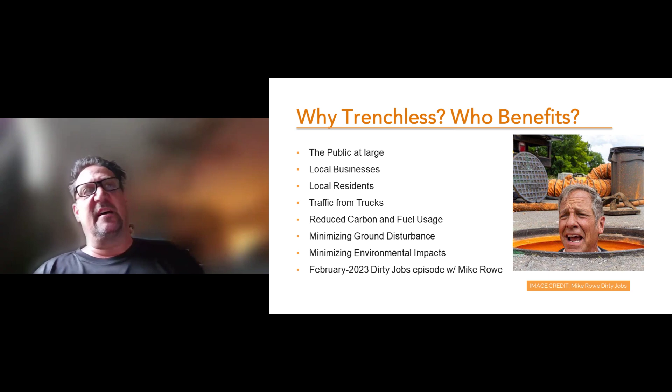Lastly, there is an opportunity to learn more about manhole rehabilitation. Back in February 2023, we did an episode on TV with Mike Rowe, Dirty Jobs, and we took him to a real dirty job. We took him to a McDonald's and we rehabilitated a manhole. That exists out there on the internet, and if you're interested, a Google search would probably allow you to track that video down.

Diagnose, advise, and treat. This is a methodology that we've come up with internally. We didn't invent this idea; I'm sure it came from the medical industry or something, but we've applied it to our lives and our daily work schedules, and it's definitely paid dividends over the years as it applies to trenchless activities.

Across the country, manholes and culverts are aging and deteriorating at a rapid rate. Left unrepaired at street level, these assets can cause concerns, vehicle damage, and potentially expensive and inconvenient replacement efforts. Below ground, damaged manholes can dilute sewage, increase sewage volumes, back up sewage alignments, and make wastewater treatment more inefficient. Bottom line, although an unseen asset from a public perspective, these assets below ground play a very important role in ensuring the system remains operational and efficient.

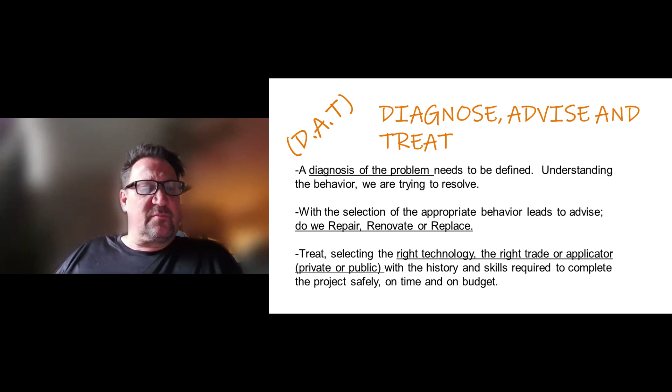So it's a Cinderella story. How big is the problem out there? There are a bunch of different studies. The one that I'll be referring to is one that I found from the University of Houston. The manhole is often overlooked and underappreciated, hence making it that Cinderella story.

To date, there's a number of research studies on pipeline rehab. These studies predominantly focus on materials and methodologies used for pipeline rehab, from structural, hydraulic, and economic perspectives. Ergo, there's a wealth of experience and tools out there for engineers to evaluate their options while selecting the material and technology to rehabilitate sanitary sewer pipes and underground manholes, i.e. underground assets.

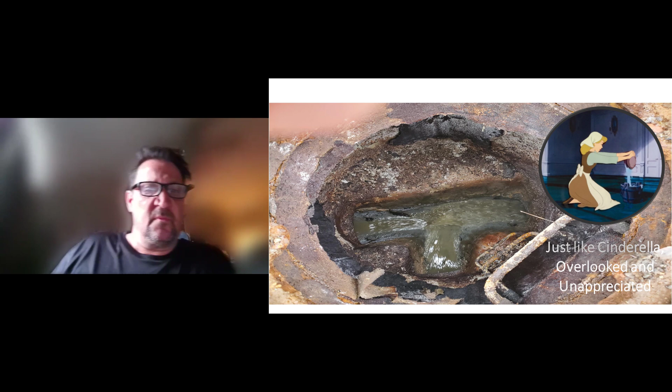On the other hand, manholes are a vital part of every sanitary sewer system, often overlooked, as they can be the main source of I&I. That's inflow and infiltration. I&I really is made up of rainwater and groundwater infiltrating and making its way into the asset. Just like Cinderella, again, the manhole is overlooked and underappreciated.

But again, manholes are considered windows into the sanitary system, as they're the most visible points for identifying the condition of our underground infrastructure. They also play other vital parts of our sanitary sewer systems. However, for this presentation, I'll be referring to them as our Cinderella.

Everything is okay, right, Rob? Sometimes, unfortunately, what can be out of sight can also be out of mind, and it's easy for us to stick our head in the sand or ignore and live a fairy tale, telling ourselves that we don't have problems, when in fact we do.

I'm going to use these ratios from the University of Houston, and I'm coming out to you today from Vancouver, British Columbia. The city of Vancouver, by these numbers, has 40,000 manholes. Approximately half of them are very likely to have challenges. 8,000 of them are older than 50 years old, and 12,000 of them are between 30 and 50 years old. Ergo, they're just starting to show some fatigue, much like myself entering my 50s here.

The city of Surrey has 31,000 manholes, applying the same ratios. 6,200 of them would be older than 50 years old. 9,300 of them would be greater than 30 and less than 50. And so with that said, 15,000 manholes in the city of Surrey are probably showing some challenges.

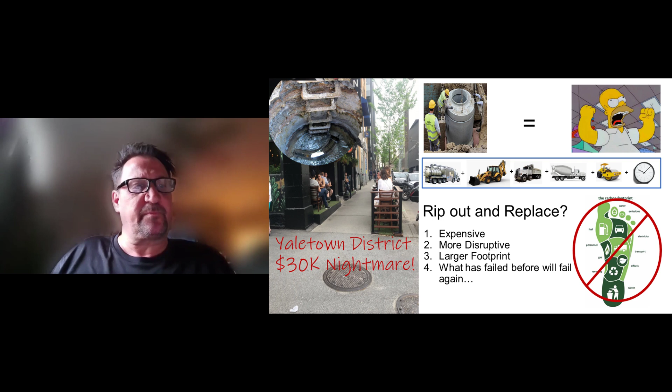So here's an example of a restaurant district here in Vancouver. There's a sanitary manhole right in the middle of the sidewalk, right next to the patio on a bright bluebird sunny day. And we can all sort of assume that conventional removal and replacement activities, civil, utility installation activities are going to be extremely disruptive. And this goes back to what I said earlier about equipment and tooling and personnel and noise and vibration and everything else. You can see quite clearly here that Homer's mad.

Yeah. This slide also highlights, we're going to have a hydro excavator, we're going to have a backhoe or an excavator, we're going to have a dump truck or multiple dump trucks for removing spoil, for importing granular. We're going to have compaction equipment. We might have cement mixers coming in to pour bases, and all of these things equate to a longer construction timeline. That said, they provide quite a bit more disruption to the community. They take up a larger footprint, and what's failed before

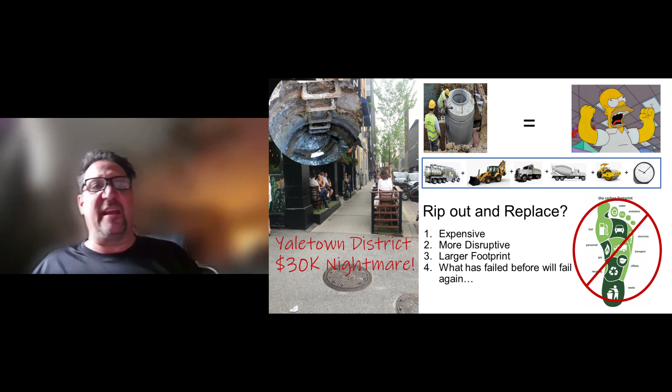will fail again. So we've seen that we installed a beautiful manhole in this location X amount of years ago, and it turns out, for whatever reason, there's high H2S and acid in this location that's eaten away the concrete of this underground manhole. And that said, great, we've returned it to its OEM condition here today, but we know that 30 or 40 or 50 years down the road, it will deteriorate once again. With that said, there are other opportunities.

So the first one is save money. This went from a $30,000 problem to a $10,000 annoyance. So just focusing very quickly and subtly on the finance piece, this allows end users to literally rehabilitate 3 manholes instead of removing and replacing one, again, where we're the right fit. So we've saved them money.

We're less disruptive because we've got a truck for the workers, and we've got a big trailer, and we're still going to have to use the hydro excavator, but we don't have the dump trucks. We don't have the compaction equipment, et cetera. And once we've applied an industrial coating that we're going to go into in more detail as this progresses, we have become better than OEM.

So yes, we've gone in and we've restored the OEM characteristics of this manhole, but now we've applied an industrial coating, in this case polyurea, that protects it completely from H2S and acid, preventing the new manhole wall thickness from corroding as it did in the past.

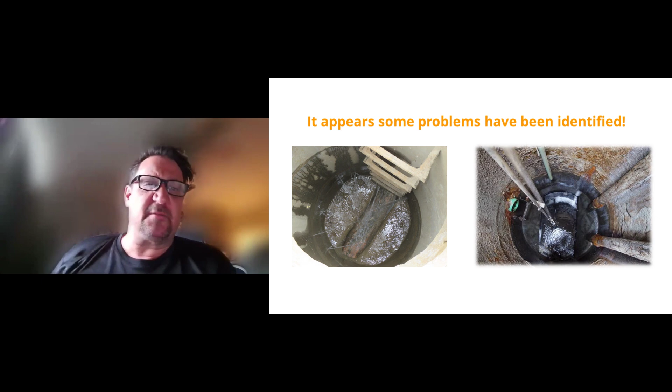So, Rob, are we going to reline all the manholes in the world? Is that sort of the answer that I'm suggesting here today? And it's not. We believe there's a much better way, but let's discuss that now. So again, a couple different examples of relined manholes. So here's the meat and potatoes here.

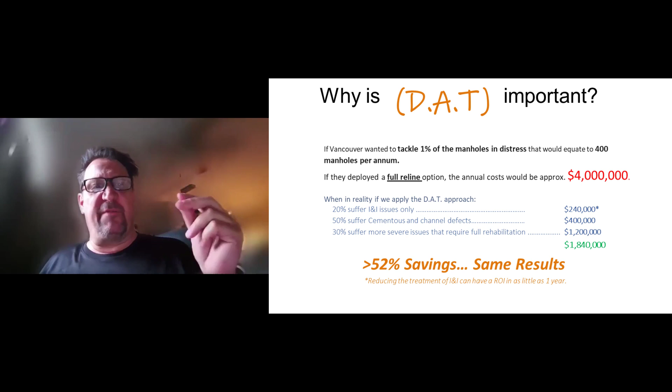Why is Diagnose-Advise-Treat important? If Vancouver wanted to tackle 1% of their manholes in distress, that would equate to 400 manholes per year. If they then deployed a full reline option just to make Rob happy, at a $10,000 average for 400 manholes, that's a $4 million expenditure. However, what we recognize from our experience in industry is that if we apply the D.A.T approach and we recognize that only 20% of the assessed manholes suffer from inflow and infiltration, it's only going to cost $240,000 to bring those manholes back to OEM.

If we recognize that 50% of them might suffer from cementitious and channel defects and require optimization with cementitious and other products, again, we can bring those assets back to OEM for about $400,000. Having said that, 30% of them, my goodness, are about to fail. They will require full rehabilitation, and for the sake of round numbers, that's $1.2 million. So what this says to us is that we can create a 52% savings and achieve the same result.

And that $2 million means a lot to municipalities and end users. That means they can do 800 manholes. That means they can fund a park project. That means they can rehabilitate a water main, or they can remove and replace a bunch of catch basins down the road. What they do with their money is their business. However, what we've been able to provide is a little bit of extra funding. And most municipalities, especially the smaller ones, really have to sometimes wait years and years to prioritize their different repairs. So this little bit of savings, I believe, can go a long way. And we got really good feedback from municipalities saying, you know what, Rob, this approach to problem solving really has paid some dividends for us.

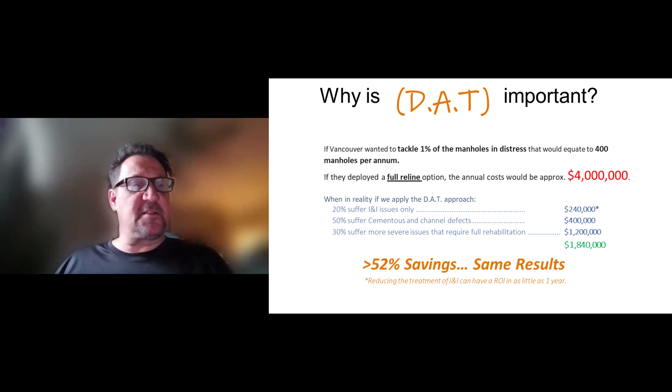Focusing in on that, I&I often represents about 20% of the defects within a manhole. The injection of polyurethane resins, which we're going to cover in a second with a little video, is the most cost effective, is considered a permanent fix, and does a great job. So you can see a worker here mobilized into what appears to be some kind of flooded chamber. You can see there's a 6 or 8 inch PVC pipe penetration, and if there was a gasket at that penetration, it's now failing, or if it was just grouted at the time of installation, bottom line, it's failing, water is trickling, or in this case, kind of shooting in. And this is very common.

So, sort of the causation of what you're seeing here is there's hydrostatic pressure out in the soil matrix that is applying force to the outside of this concrete asset, and where there's give, there's go, and water is leaking in or trickling in. What the worker's doing here is he's drilling a hole, and we're going to inject polyurethane foam into the soil matrix at the leak location, and we're going to use that very same hydrostatic pressure that's causing our leak to hold our patch in place.

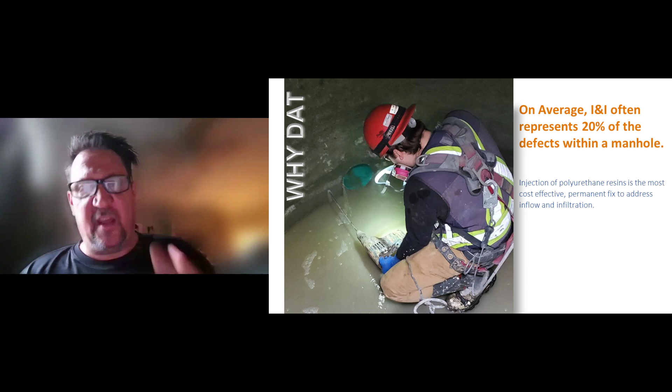Because our product, and I'm going to say our, I mean all polyurethane resins on the market, there's two kinds, hydrophilic and hydrophobic. Focusing on the phobics, they displace any water, they homogenize and mix with the silts and the fines, and they literally create a foam patch on the outside of the concrete asset, installed properly. And again, that same hydrostatic force causing the leak is now used to repair that leak and stop it from leaking. And the biggest thing out there that destroys polyurethane foam is UV. Underground, this product can last 100 years.

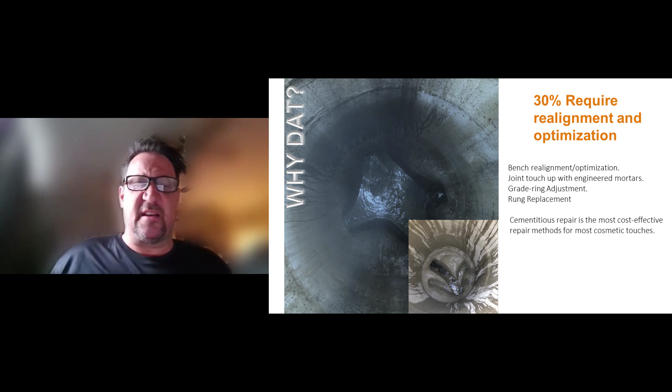Talking again more about the realignment and optimization. Sometimes manholes, you know, this one looks like it was leaking, but that was actually just from washing it free of biologicals to make it safer for the worker to enter. And it's just that the concrete had broken down in the benching. It was probably poured in place years ago, not precast. And a little bit of cementitious work goes a long way to making sure that the manholes that are often used in design for horizontal deflections are doing just that. And we're encompassing additional alignments, rather, laterals coming into those locations.

Then there's the other ones, and sometimes this is that X percentage where, unfortunately, the Cinderella story comes back, and we have ignored, or we've either failed to audit, or somehow missed. And so you can see that hydrogen sulfide and acid have just completely attacked this asset. We've lost half of the concrete wall thickness. We know this because we're down to the exposed reinforcing steel here. So where this would have started out as a 5-inch thick concrete barrel, it is now 2.5 inches thick. That's putting it at risk of failure, or it is failing, and groundwater or soil is coming into the asset.

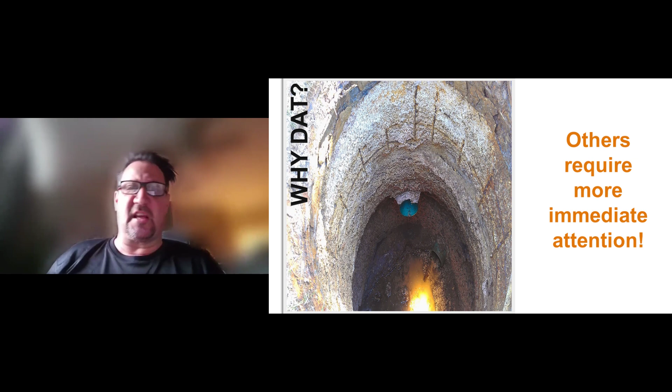You can see that all of this material that scaled off and fell off ended up in the bottom of the asset, clogging the channeling, preventing water and solids from flowing downstream to their final destination, if you will. You know, this one is at the absolute top of our priority list. This asset is nearing failure, and normally failure means it implodes, it falls in on itself, and sewage backups happen. And if they happen in the middle of the night, sometimes they're not detected till the next morning, and sometimes people wake up with some pretty nasty things in their basement due to issues like this. And my heavens, it is avoidable.

So one of the best ways to go out and sort of understand how big the problem is, is condition assessment. And this is a service that we and others offer, consultants, other contractors out there. Condition assessment, really getting an understanding of the condition of our assets. These can be completed in the field, so no confined space entry is required at this time. It's done at the per asset level, and the asset inventory is confirmed, and we can understand some of the characteristics of each asset. We can confirm the depth of the manhole, the diameter of the manhole, the materials of the manhole, most commonly concrete, but what are the connecting pipes made of? Asbestos cement, PVC, they could be metallic. What size are those connections?

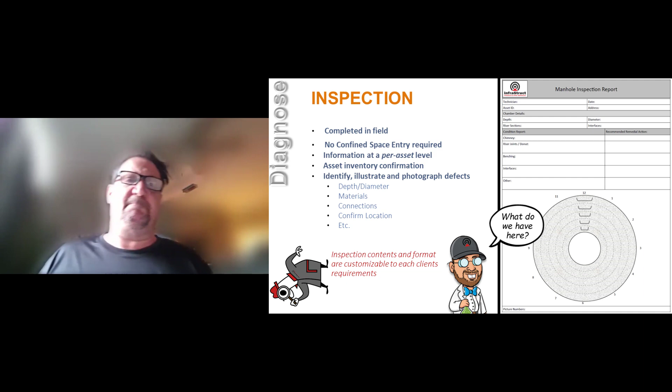So with that information, then we can go back to the office, and in the office, we can review the inspection data and recommend an action plan. That's really important because what we want to communicate to the client is a prioritized list and timeline. My heavens, we found 3 manholes that are at risk of failure today. You guys really need to focus on these 3 first.

And you know what, Rob, we don't have a budget for manhole rehab. Well, you know what? You probably want to deal with these 3 in whatever way is possible with the resources you have, and plan to deal with these other ones in the future as your budget or as your funding is provided.

The other opportunity it provides us is it helps us recognize systemic issues across multiple assets. It's very common when you come to a neighborhood and you find H2S damage in a manhole, the next manhole you're going to open in line is probably going to have that kind of corrosion as well. As well, you might recognize surcharging. The opposite of a surcharging manhole is a vacuum, and both of them can provide certain dangers.

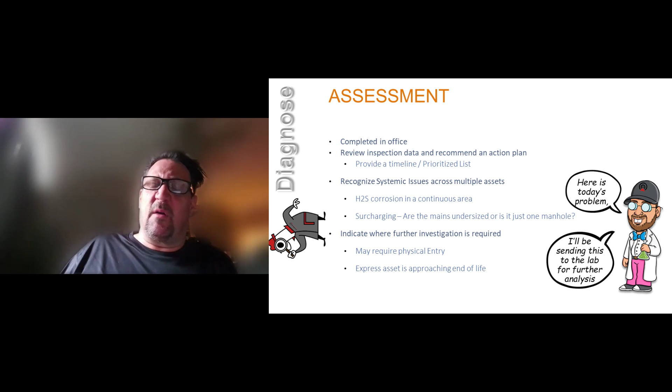So at this point as well, we may have identified that further investigation is required on these 5 or 6 manholes. We need to get in and physically take a look up close and personal at this, that, or the other thing. Maybe take a picture so we can share it with others, and really evaluate if at the end of the day the asset is just approaching the end of its life. Sometimes they are. And sometimes, rehabilitation isn't the answer. Again, under treatment, it's remove and replace, conventional activities.

With that said, the 3 typical behaviors that we experience and witness out in the field, and this covers under diagnose, where we are out there and we're visualizing. We have hydraulic inflow and infiltration, that is groundwater leaking in. We might have environmental exfiltration.

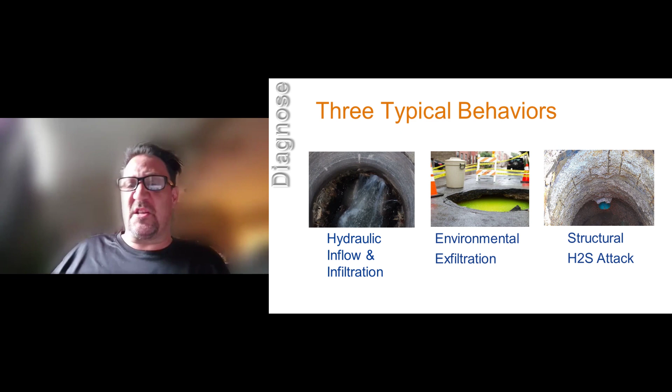I went to a landfill in the past where they had a leachate system and the manholes were leaking into the soil matrix. Previously, they did not understand that. They were happy to make that realization, as they wanted to obviously deal with it right away, and they did. And then there's the structural H2S and acid attack that I showed you in the previous slide.

So what are my options? The most common option here is point repair, and I call this see a leak, fix a leak. So there's a few different ways that we can fix a leak after we've witnessed it. Portland cements, shotcrete type mixes. There's hydraulic patches, and there's roll-on membranes, and there's the injection of polyurethanes or polyurethane foams, like I mentioned earlier. So we see a leak, we have a leak, and we have some options.

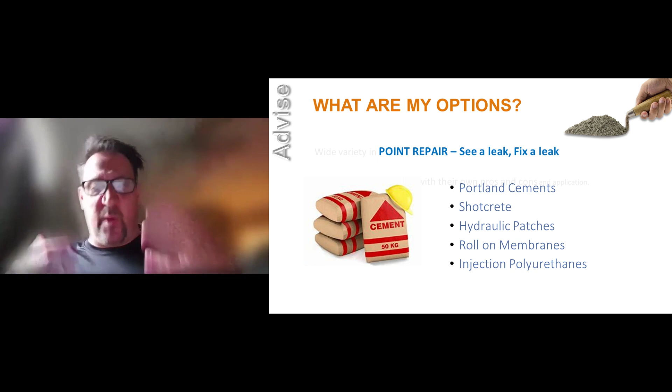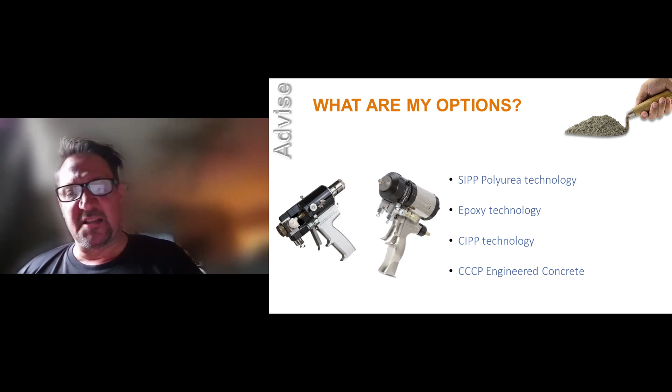What are my other options? Some of our assets might be deteriorated to the point that we need a different option. So that is SIPP, polyurea technology, SIPP being sprayed in place pipe or a pipe within a pipe. There's wonderful epoxy technologies out there in industry. There's CIPP technologies that are out there. And there's CCCP, that's a lot of C's, engineered concrete solution, that is centrifugally cast cementitious products. And we'll talk about that shortly as well for a better understanding.

So another option that's out there is mechanical seals for manholes and culverts. Manholes and culverts really share a lot of the same characteristics. One's vertical, one's horizontal. One of the biggest pluses about seals is they're economical. They really are. So you can fix a chimney leak with an internal seal without even going in the manhole. The reason that's relevant is because confined space entry takes time, and time costs money.

So the second benefit of mechanical seals is it doesn't take a lot of training to be able to install these seals. So this is quite often something end users and municipalities almost 100% of the time can install themselves, and they can carry some small, inexpensive inventories to have on the shelf. So when they experience it, they have a solution. They don't have to reach out to me or someone else to make a repair. They have the tools at their fingertips.

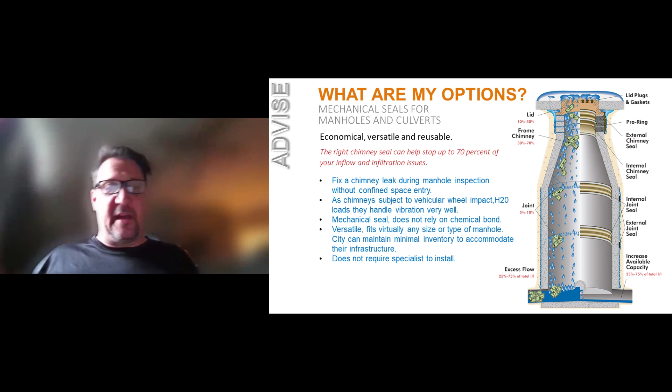So, external seals can also be used in areas where, when we're installing a new manhole, we can recognize there's groundwater. To install this manhole, we had to run a pump for 4 days. So we know that as we install it and we backfill it, the groundwater is going to come back up. This would be a great time to prevent I&I down the road by applying an external seal in the pre-construction phase. There's also butyl products that can be spray applied, roll applied, or brush applied externally that would accomplish the same task.

Advise full structural repairs. So full structural repairs, again, common reasons for failure ultimately is corrosion. The corrosion happens from sulfuric acids, our old friend H2S, road salts, and other acids from external sources, and of course I&I. So again, just to review what's going on with inflow and infiltration is as that water's leaking in, it's bringing soil in, and fines, that's creating voids in the soil matrix.

And those voids are now filling with water, that same hydrostatic pressure that's causing the leak. And as we apply H20 loads up top at street level, it's causing compaction and it's causing failure and alligatoring to the asphalt and void failures in the soil matrix. Of course, as previously mentioned, the spalling of the concrete substrate is also something.

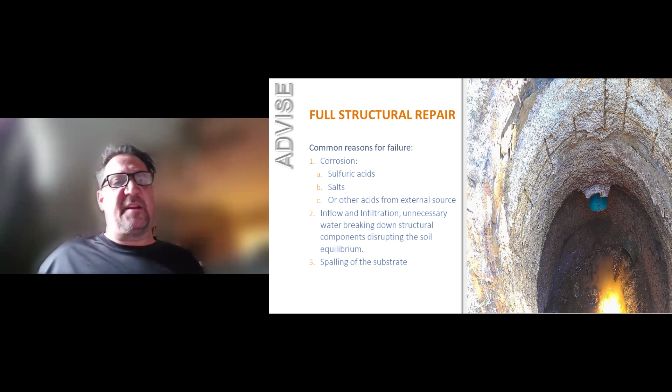We know that all of this material has made its way into the benching. It's clogged the benching. It's gone through a pump. It's been washed down to the next manhole, the next manhole, the next manhole, maybe down to the wastewater treatment plant, depending on proximity. Wherever these fines end up, they're going to have to be dealt with either with hydro excavation or evacuation in some capacity.

Other I&I challenges we have is through the frame and lid. So again, this is where rainwater is most prevalent at street level, and I&I through the manhole frame and lid can overwhelm sanitary systems downstream. First of all, we have solutions for that, but the reason for that is that we have 2 3/4-inch pick holes in every lid. That allows us to put a bar in there to remove the lid for entry or inspection. That also is the same as the drain in the bottom of your bathtub.

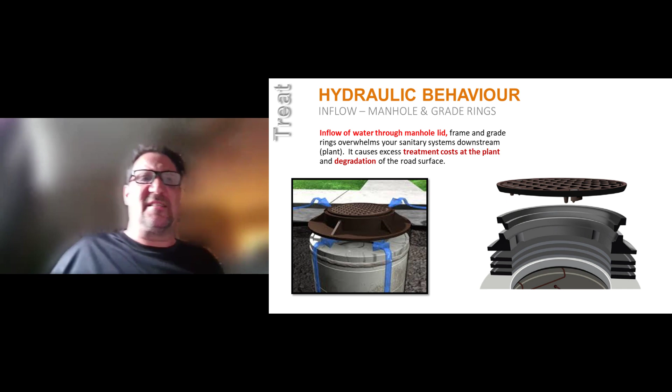So as water cascades down the road, and if it finds its way to these pick holes, rainwater is now going into your underground asset and watering down at minimum the effluent. And municipalities are spending money to mitigate rainwater. That's just crazy talk. So how big is the problem? There's, again, a few different studies. I was really just trying to demonstrate a point here.

These numbers might vary a little bit, but in this case, it's saying that 0.4 of a liter per second inflows through the 2 pick holes with 1 inch or 25 millimeters of submergence. So where there's 1 inch of water running over a surface or into a puddle, there's 0.4 of a liter going in. That said, a 6-inch puddle is letting in 1 liter of water per second. That's 60 liters of water per minute and 3,600 liters of water per hour, 24 hours a day, 48 hours, 72 hours till we get to it after the 250-year storm and deal with it.

So in British Columbia, some of our smaller municipalities unfortunately experienced this a few years back when we had a 250-year storm event, flood event, and their wastewater treatment plants were overwhelmed to the point where they had to physically be abandoned. The workers had to get in their trucks and drive away because the water just kept coming up and there was nothing they could do about it, and ultimately it turned into a swimming pool. All the water they were trying to treat mixed with rainwater spread out over the landscape. It was a disaster.

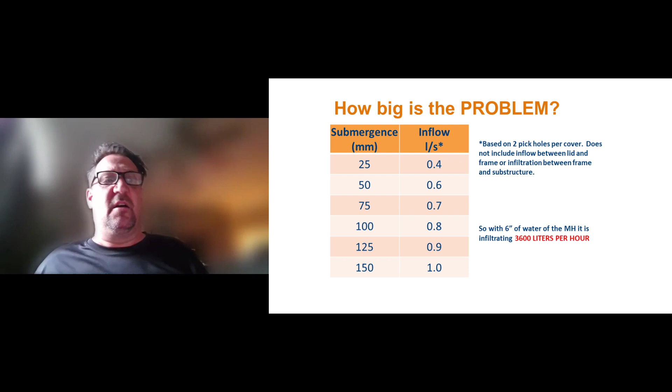So where they're in floodplains or where floods are known to happen, there is something that we can actually do about that instead of just letting it go into the system. There's other options as well.

So talking about the throat of the manhole anatomically, that is one of the more common or most common places where I&I happens. There are solutions. There are EPP grade rings instead of concrete that are tongue and groove, are put together with sealant, and they are bolted to the top of the manhole donut versus a concrete cap to hold them in place. With that said, the frame and lid is also bolted, and it becomes an assembly or a sandwich.

And this, without applying any grout, recognizing that this is an area where I&I is common in the top part of the matrix, this is a fantastic solution to mitigate I&I versus conventional concrete riser rings. The challenge with concrete riser rings is compound angles. Roads are often 1% uphill or downhill and 1 or 2% crossfall.

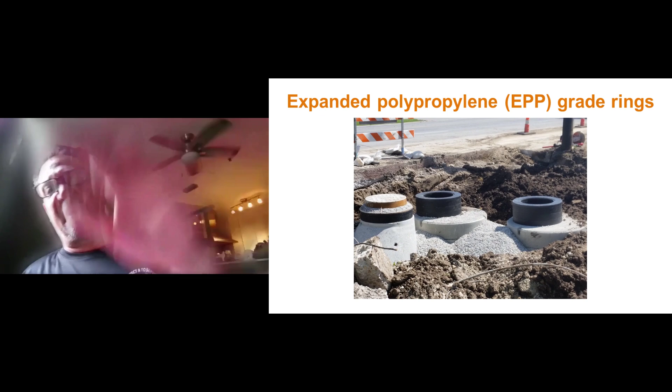What's different about these is they have tapers. They're not shown in this picture, but we have these plastic riser rings that are 1/2 inch at one end and 2 inch at the other. And so we can turn them like on the clock radius to accommodate that 1% uphill. We can put another one on top and accommodate that 1 or 2% crossfall. So simply by rotating our tapers, we can match the grades in the field.

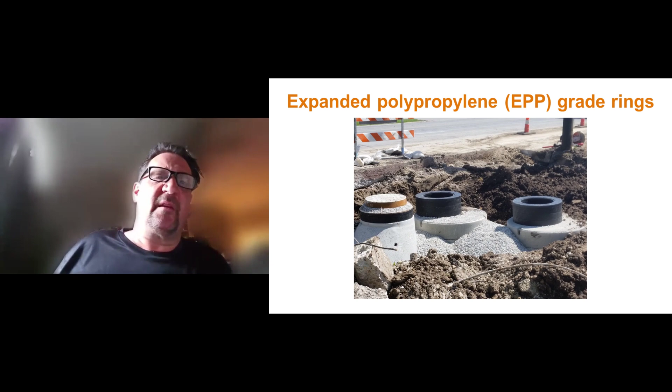Another big benefit, I don't remember how much concrete riser rings weigh, but it's a lot more than 2 pounds. These ones are super lightweight. When you throw them into the back of a truck, they don't break or crack. It doesn't take a forklift to throw a bunch of these in the back of a truck on its way to site in the morning. You can store them out in the yard. If they're in your way, again, you don't need a forklift to move them out of your way. They're just very user friendly.

Now, moving on, we also have frame and lid systems that are watertight up to 1 bar. So they'll withstand about 15 feet of static head pressure. They're cam activated, that's saying they lock. And you can see on these, they have handles for removals instead of pick holes. So essentially, this could be installed at the bottom of a swimming pool.

I can't imagine in what scenario, but this is a great way, especially combined with an EPP riser ring like I discussed here, where this could all be bolted together in assembly in a flood-prone area and completely eliminate groundwater I&I. At least from the surface, pardon me, at least from the surface.

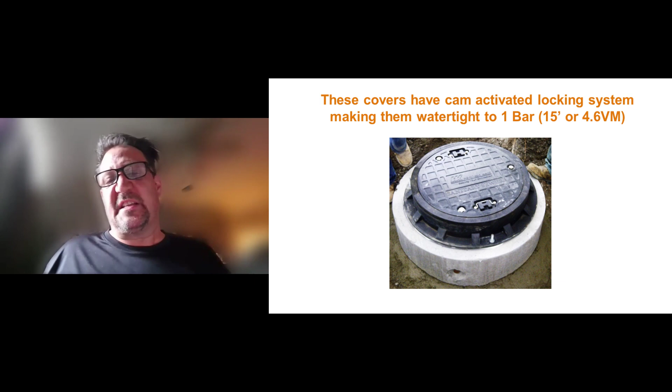What's going on under the hood? These are the cam-activated locks, and you can see again for the actual lifting and removals, there's handles. With these handles, there's also fulcrums that can be used so a worker doesn't have to use his hands and as much of his back.

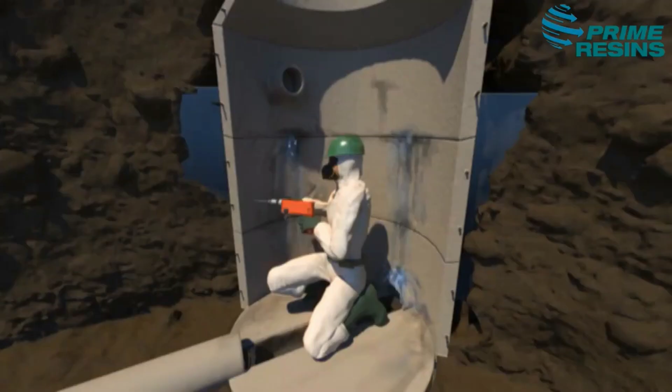So slide 37 here, we're going to go through a little animation that shows curtain grouting. Curtain grouting is the name we give the process of injecting resin into the soil. Allison, is that animation playing? Here we go.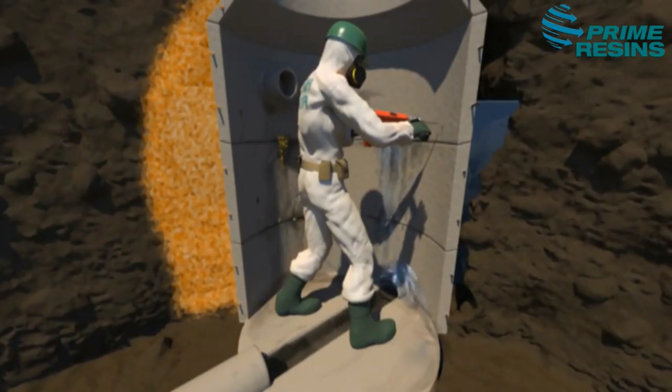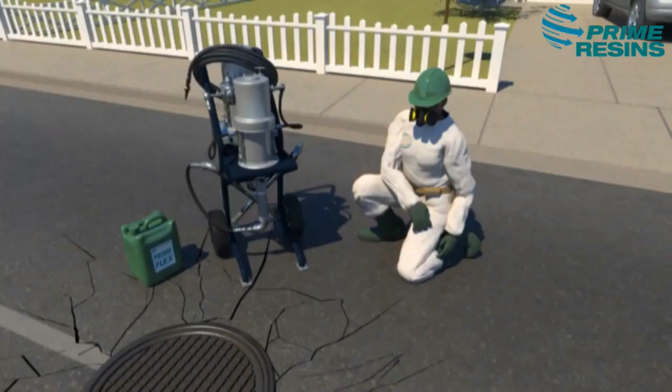So this is a very common repair methodology. It's considered a permanent repair. It's very effective, and in some cases, depending on the depths and diameters and number of leaks, etc., the most economical as well. So fantastic solution. There's a few different manufacturers out there. They all make fantastic products, and it's a great solution.

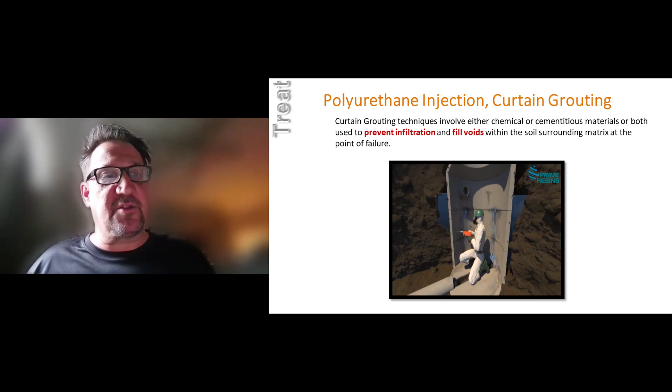Here's another video, slide 38, of an interface leak repair. It's just going to take a second to start here. So interface leak repairs are

So again, a lot of reference earlier to semi-structural polyurea systems. You were all already familiar with polyurea. The 1987 Pontiac Fiero was made of polyurea. The only difference between the Pontiac Fiero and what we use polyurea for is that our polyureas, ours and industry's polyureas, are engineered specifically for wastewater. That is that they are resilient to abrasion, and that they are not affected by H2S and acid. So there's SWOT testing and different hydrochloric acid tests out there to verify that information.

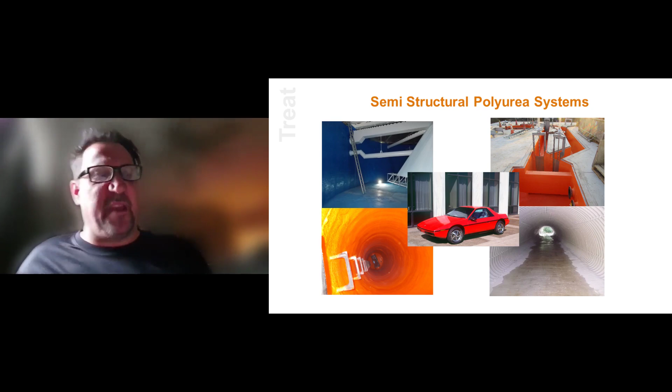And really, that will demonstrate the resiliency that polyurea can add to concrete or in this case, brick assets. So what we know is that as a concrete or brick asset deteriorates in the field, even after we apply a polyurea industrial coating, it's going to continue to deteriorate behind the scenes. So it's really important, again, this is a semi-structural solution, that our liners have a large amount of integrity. And you can see, hopefully, right now that he's really starting to smack the heck out of this brick, but it's staying completely intact. Come on. Trying a little bit harder.

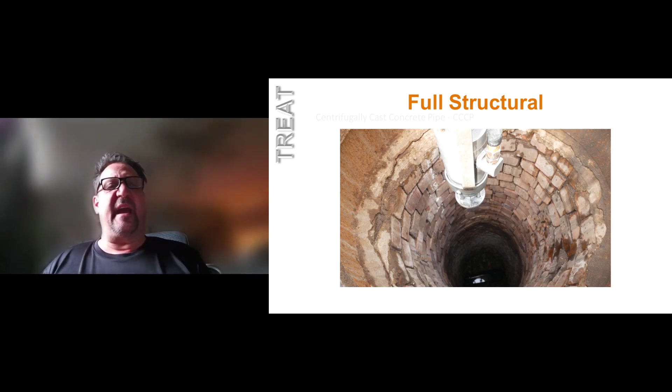So moving on to slide 41, I have another slide to show you, and this one we'll be able to overlay for your convenience, but what you're going to see here is CCCP rehabilitation. So this is centrifugally cast concrete pipe. We have an air spinner that pneumatically spins at 4,000 RPM

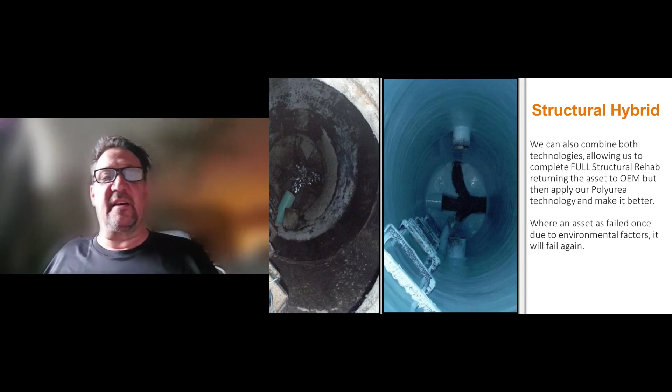And then lastly is structural hybrid. So a structural hybrid is bringing both of these, CCCP full structural rehab, together with a semi-structural industrial coating. And again, restoring the original wall thickness of the concrete. And then because it's failed once, it will fail again, applying an H2S and acid resilient industrial coating to it to prevent future failures.

Before I move on to questions, again, I just want to review that, to propose a solution, we need to define the behavior that we're trying to resolve. Diagnose, advise, and treat is the roadmap for this activity. Eliminating I&I into your system saves an average of $3,000 per year per asset. That North America-wide adds up to tens of millions of dollars that are spent every year treating groundwater from I&I.

Now, before I go on, there are other sources of I&I, connecting laterals and pipes themselves that are leaking at the joints and such. But this is focusing on what we can do. There are other technologies and solutions for pipelines, but the manhole really is the most visible and accessible place that we can focus our efforts.